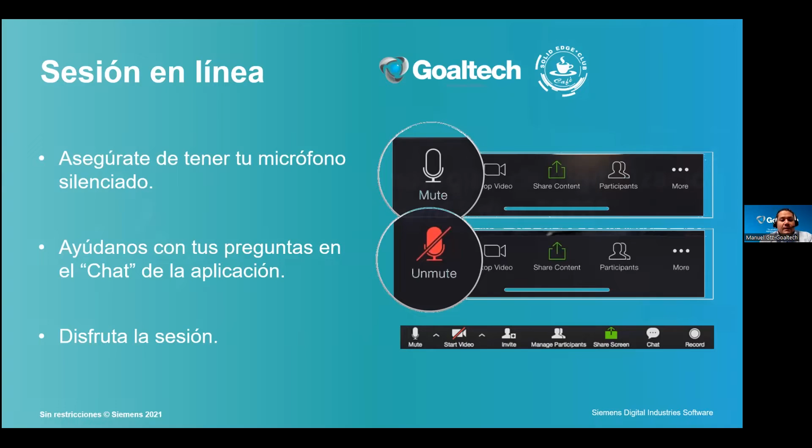En este caso vamos a ahondar un poquito más, vamos a profundizar acerca de las herramientas para crear, conectar y colaborar con la nueva versión 2023.

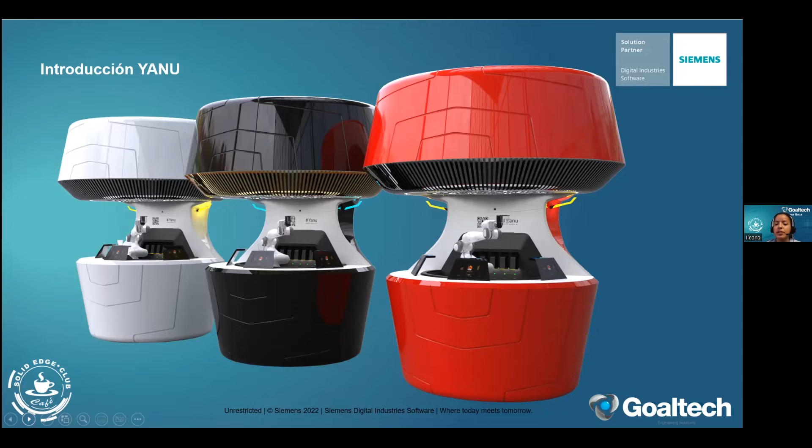¿Qué quiere decir esto? Que él va a ser el encargado de preparar los tragos, manejar los pagos y reconocer a clientes para servir estas bebidas de acuerdo a sus preferencias. Vamos a estar viendo cómo es que funciona.

Y así es, como ustedes lo vieron, este es un robot, un bar autónomo, y surgió la idea a través de la pandemia que nos llevó a cambiar a muchos nuestra forma de trabajar. Los fabricantes se enfocaron en crear un bar sin contacto. ¿Qué quiere decir esto? Que este autónomo va a entregar los vasos directamente en la barra sin necesidad de estar tocando pantallas con una aplicación. Esta versatilidad se ve reflejada en toda esta tecnología.

Cabe destacar que Yanu es uno de los participantes de Solid Edge Startup, este programa que tiene Siemens para los startups que están iniciando en el área de diseño. Si necesitan más información, tenemos un webinar de Solid Edge Café dedicado a esta parte de startup y cuáles son las herramientas que vienen en este programa; nos pueden contactar si necesitan más información. Este va a ser el elemento o producto con el que vamos a estar viendo todas las mejoras a lo largo de esta sesión.

Posteriormente vamos a hacer sesiones enfocadas en cada una de las mejoras. Recuerden que el portafolio de Solid Edge abarca el área desde diseño, electrical y simulaciones. Abarcar todas esas áreas en un ratito no nos daría el tiempo suficiente.

Harsh International are manufacturers of farm machinery, industrial equipment, and hydraulic hoists. Harsh is using new capabilities provided by Solid Edge SaaS to collaborate more effectively and reduce their design and development time by as much as 80%. An 80% reduction in design and development time. Wow, that's what Solid Edge SaaS can enable.

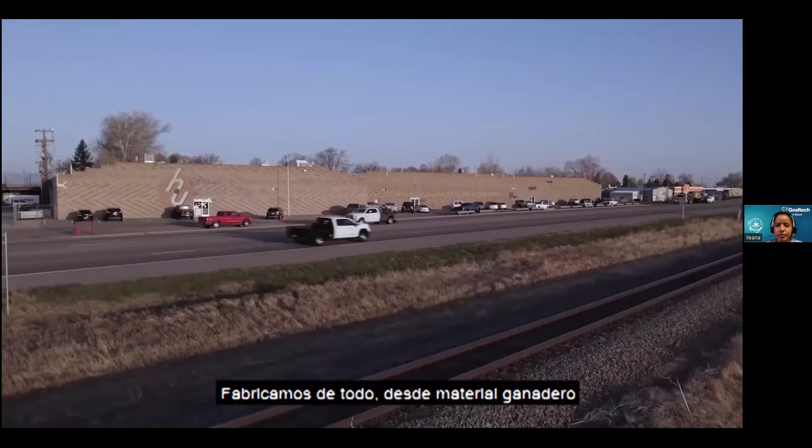Let's take a look at that journey. Harsh International is a manufacturing company in northern Colorado. We manufacture everything from livestock equipment to hydraulic truck equipment. Bob came to me with the idea to create a larger hoist, but one that doesn't have the cylinders swinging underneath the truck.

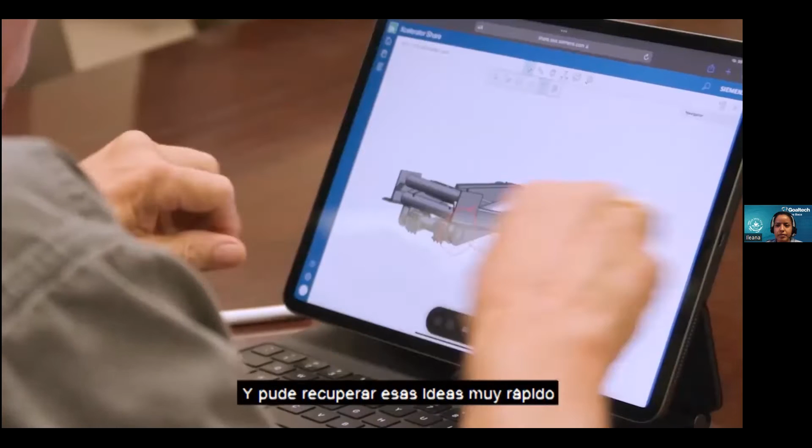With Xcelerator Share, we could click on it, send it to Bob. It didn't matter if it was over the weekend or he might have been in the office next door looking at it. Those guys would be able to pull it up on their computer and just take a look at everything and say, this part could be a little bit different. And I was able to bounce back those ideas really fast between all of us.

The need for people to be in the same room is not near as important as it was before. Now it's on a computer screen. Everybody knows exactly what needs to be done. As soon as they complete it, you see the result of that right there on the drawing, the 3D solid model I'm looking at. The time you spend addressing that issue is dramatically reduced.

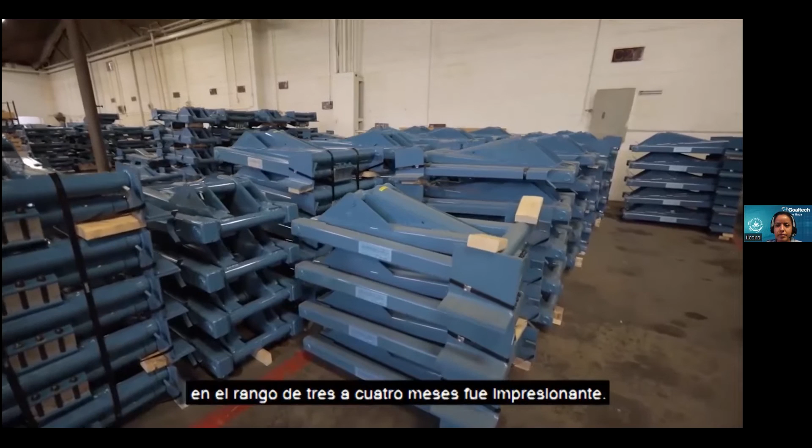Being able to take that hoist from conception to fruition and then on to production in something in the range of 3 to 4 months was awesome. Hitting that market as fast as you can means taking advantage of that market as quickly as you can. That's what Share has done for us.

We love helping companies like Harsh succeed with digital transformation. Siemens is committed to that mission. The investment Siemens has made over the last several years has been just phenomenal.

The result of that investment is Accelerator, a catalyst for the digital enterprise. Accelerator is our comprehensive, integrated portfolio of software, services, and an application development platform. The portfolio accelerates the transformation of businesses into digital enterprises and unlocks a powerful industrial network effect.

As a key part of the Siemens Accelerator portfolio, you can think of Solid Edge as your on-ramp to digital transformation. Focused on the requirements of small and mid-sized manufacturers, Solid Edge enables manufacturers to create a comprehensive digital twin of their products, and includes solutions for mechanical design, electrical design, simulation, manufacturing, and publications.

It also includes solutions for data management, for managing all the technical data that's created and consumed when creating and supporting the digital twin. It facilitates collaboration both within manufacturing companies and with their external resources, including suppliers and customers. Solid Edge is your on-ramp to digital transformation.

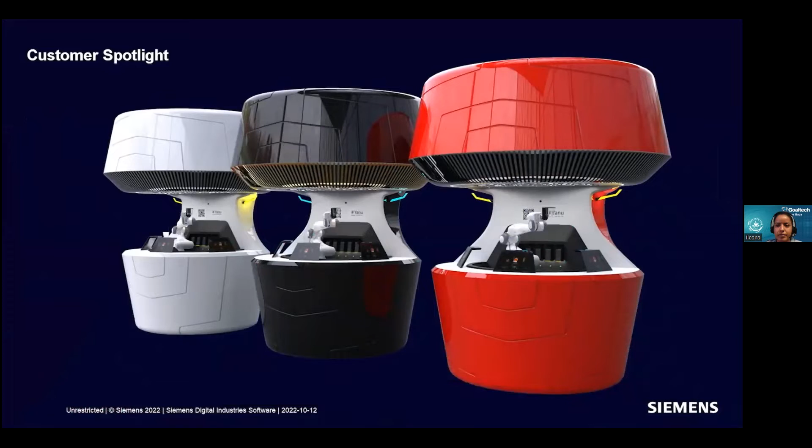With this year's release of Solid Edge 2023, we continue to push the boundaries of product development, leveraging the comprehensive digital twin, with exciting new capabilities such as simplified modeling workflows, value-based licensing, Solid Edge SaaS, improved interoperability, Solid Edge Inspector, Kanban boards, and literally hundreds more.

Solid Edge 2023 is our best release yet. Beta customers have already had the opportunity to experience Solid Edge 2023. Here's what they had to say.

Francisco at Fiorini was really impressed by our focus on daily workflows. And Zohar is excited about being able to work easier and faster.

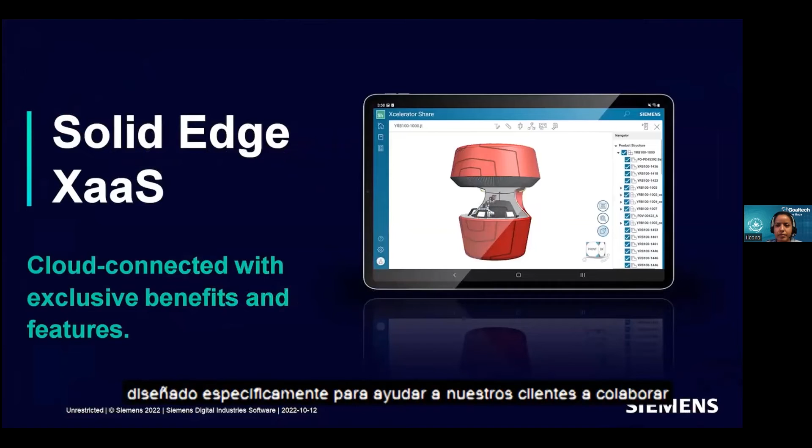Solid Edge XaaS includes next-generation cloud-based technologies specifically designed to help our customers collaborate with colleagues, partners, and customers in a secure environment. And there are many other benefits that come with Solid Edge XaaS.

Let's break it down. First of all, Solid Edge will always be the heart of your product development process with its powerful CAD and manufacturing preparation capabilities. But there's a new way to consume Solid Edge called XaaS. It includes all the things you love about Solid Edge, but so much more.

Data management and security, the ability to have your data securely stored in the cloud and share with others. Augmented reality, the ability to look at your product in the context of the real world. Collaboration, everyone working from that single source of truth, and they can share that data, they can effectively communicate. Mobility, anywhere, anytime, any device. And value-based licensing, gets the features you need when you want them.

Choose the add-on capabilities you want with instant access to tools like Generative Design Pro, Point Cloud Visualization, and Solid Edge Electrical Routing. We'll talk more about the broad range of capabilities you get with Solid Edge XaaS in a second.

Right now, let's focus in on some of the great project management and search tools that are part of Solid Edge XaaS. Jeff? Thanks, Dan.

Collaboration with colleagues, partners, and customers has never been easier with the new productivity and collaboration tools in Xcelerator Share for Solid Edge 2023. A new modern dashboard helps users understand the status of project deliverables at a glance using the Xcelerator Share homepage.

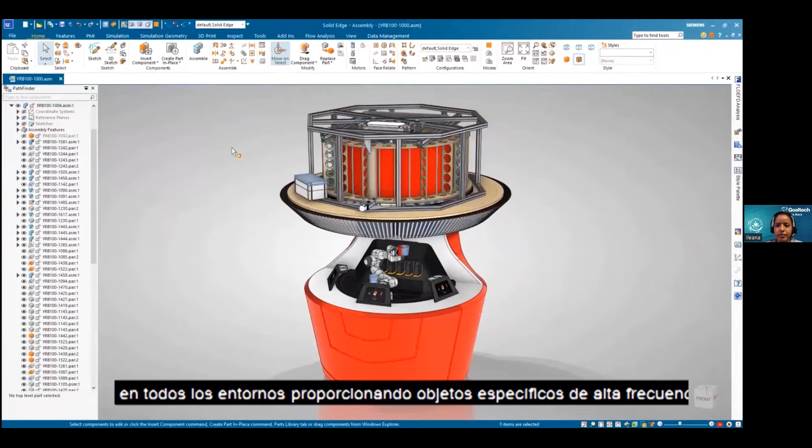Context toolbar capabilities have been expanded in all environments, providing high-frequency object-specific commands at the tip of your fingers, improving productivity.

Focusing on the robot arm, we will complete the design of a new glass holder. The material addition and removal workflows have now been combined into one single command. Also new is the introduction of automatic regions in ordered sketches. This speeds the process of sketching by eliminating the need to trim sketch elements and project face edges.

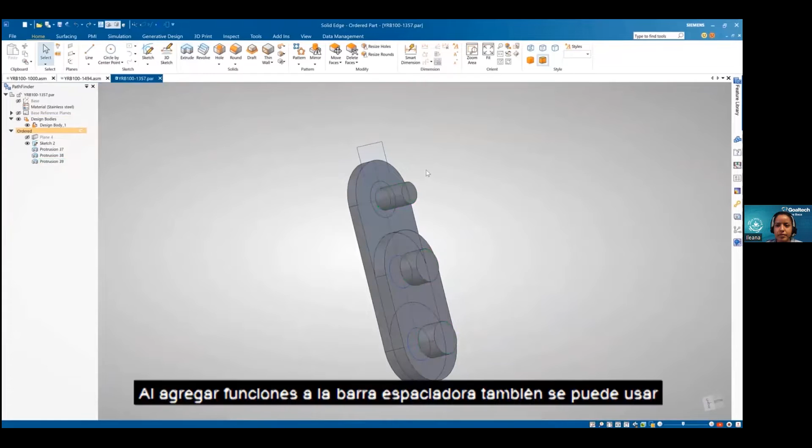Closed areas are found automatically, as we can see here, as we add and remove material with a single extrude command. Changing the extrude feature to a cutout couldn't be any simpler—just edit the feature and change the options. When adding features, the spacebar can also be used as a quick toggle to switch between add and remove.

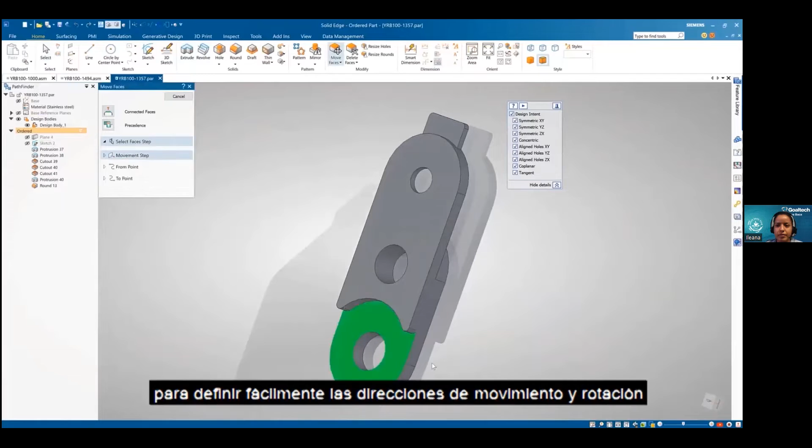Solid Edge 2023 also speeds up the process of direct editing in an ordered model by introducing synchronous capabilities in the move, rotate, and offset commands. Here the steering wheel is used to easily define the move and rotate directions, and design intent rules can be used to control the movement of other faces in the model.

Here we can see this as we adjust these two cylindrical faces and toggle the concentric option on and off. One final alteration of this part is to add an angle to the side faces by using the rotate command. The enhanced workflows make this a breeze.

Since this is an ordered model, the move and rotate features are captured in the Pathfinder and can easily be edited later. The hole feature capabilities have also been extended and now have support for standard class fit tolerances for simple, countersunk, and counterbore hole types. These conform to the ANSI, ISO, and DIN standards. Support for unit tolerance has also been added.

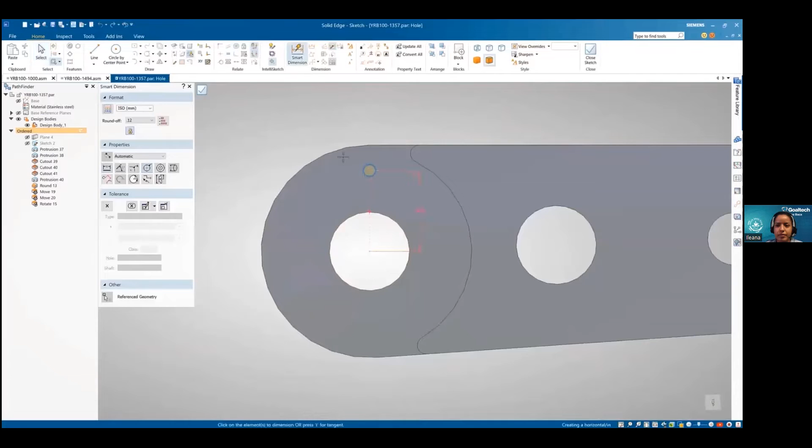Solid Edge 2023 also introduces a new library of high-quality face styles, which consist of many common categories containing thousands of different styles, ranging from additive manufacturing, coatings, fabrics, plastics, metals, and many more. They can easily be dragged and dropped into the desired parts to quickly add realism to any design.

There have also been improvements to assembly features with the addition of new commands such as slot, swept cut, subtraction, and union. In this case, we'll add a swept cut, creating a path through two large components at the top of the design. The workflow is consistent with the swept cut in the part environment.

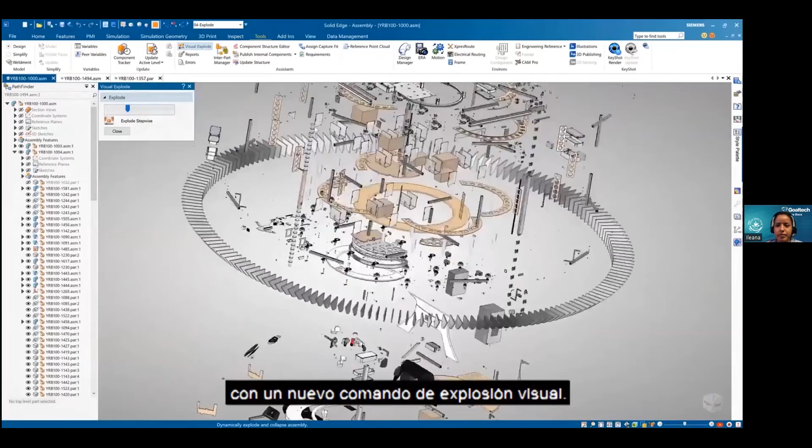Finally, there are new workflows to easily explore and visualize the internal components of any design with a new Visual Explode command. Simply drag the slider bar to dynamically explode the parts on the screen, then drag it back to collapse the parts back into place. There is also a stepwise option that intelligently explodes the subassemblies in sequence and provides additional ways to visualize the design.

Awesome. Thanks, Jeff. It's really exciting to see how some of the great new technology from Synchronous has been moved into the ordered, history-based environment. It's increasing productivity while speeding onboarding for first-time users. Things like regions are just a huge productivity saver, as is the ability to drag to define whether you want to add or cut.

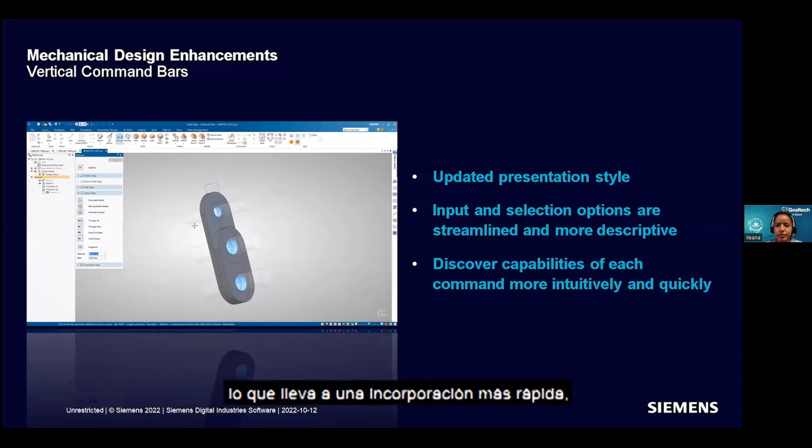In addition to bringing some of the great technology of Synchronous into ordered, we've also revamped the user interface to be a lot more fresh and productive. A clean, modern presentation of a command's options allows users to discover the capabilities of each command more intuitively and quickly. Similar to the presentation styles of many other CAD solutions, the vertical command bars allow new users to adopt Solid Edge more quickly, leading to faster onboarding, increased satisfaction, and a lower cost of training.

We've also brought the commands closer to the action. The context toolbar pops up the highest frequency, object-specific commands right at the user's cursor. With command options available right at the point of focus, mouse travel is minimized, improving productivity and streamlining the user experience.

Mirko Markovic from Kaiser immediately saw the value of the new UI, noting that they can work more intuitively and efficiently.

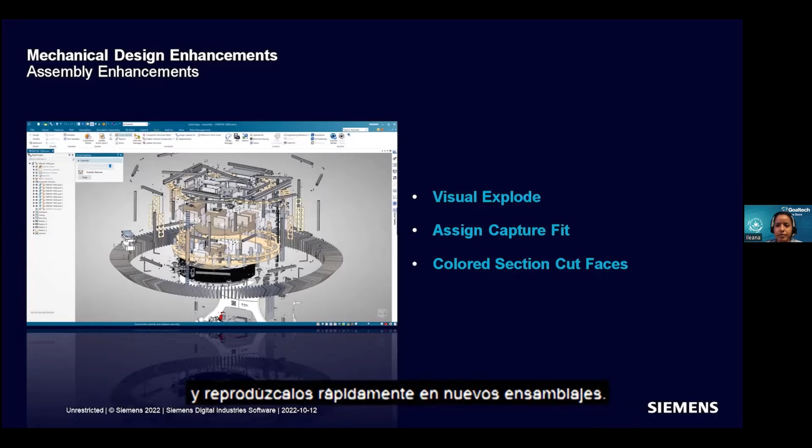And isn't the Visual Explode just amazing? I love that staged mode where it does sub-assemblies first and then it explodes down the levels. It's really great stuff. We've also continued to build out our automated assembly tools by allowing users to capture common relationships and quickly replay them in new assemblies, as well as many other daily productivity enhancements.

Again, positive feedback from Jan, excited about the new Assign Capture Fit functionality. It's great to see all the new material and visual styles as well. This has been a collaboration across various parts of Siemens to deliver not only very useful, but consistent styles across products. It's as simple as drag and drop.

New interoperability enhancements unlock the power of your design data while future-proofing your work. Transfer Solid Edge data to and from the Xcelerator portfolio of products, including NX and Process Simulate, easily and accurately. Let's take a look. Over to you, Jeff.

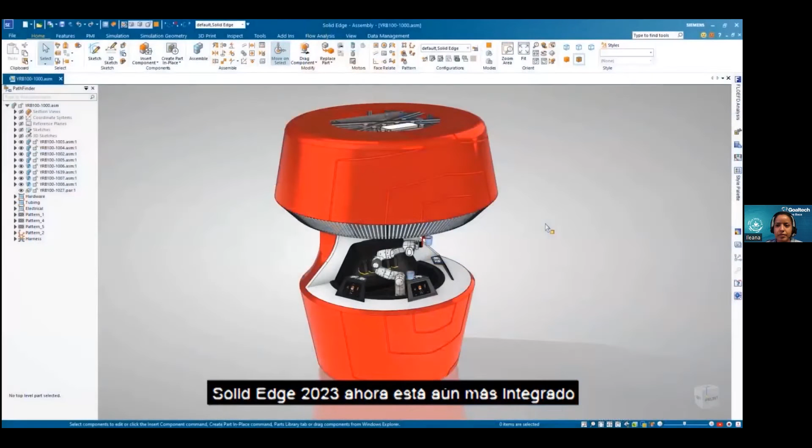Solid Edge 2023 is now even more tightly integrated with other downstream processes and can transfer assembly kinematic information to applications such as NX and Process Simulate to perform further dynamic studies or operations.

In this example, we will see how we can save time and minimize errors by transferring the motion kinematics of this robot arm from Solid Edge to Siemens Process Simulate.

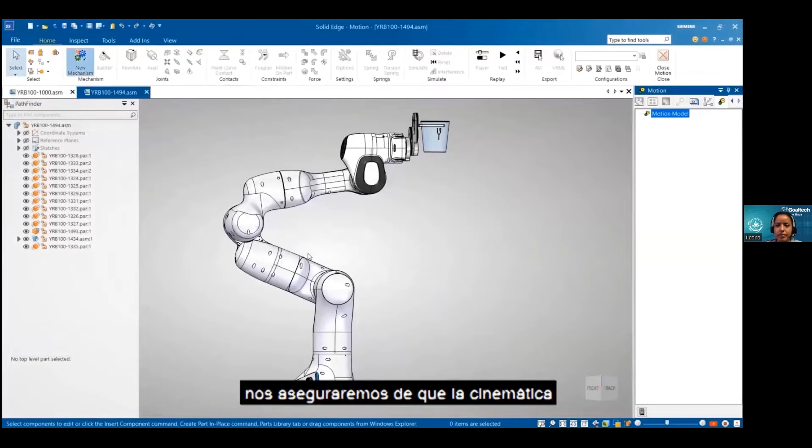Starting in the Solid Edge motion environment, we will make sure the kinematics are properly defined by selecting all the parts, then choosing which ones are moving or fixed. This creates the 7 needed joints to replicate the 7-axis Panda robot. Once this is done, the motion of the robot can be verified by running the basic simulation.

Now the Solid Edge model can be exported with all the appropriate kinematic information and subsequently opened in Process Simulate. Once in Process Simulate, we can see that by using the joint jog option, all the relevant kinematics are present without having to do any additional work.

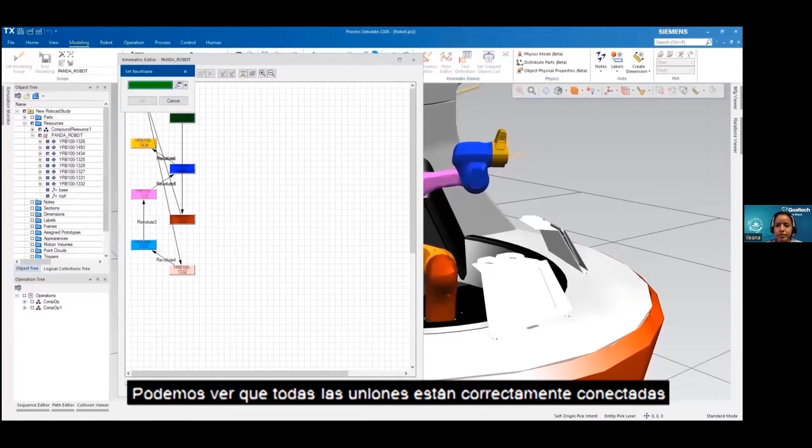The kinematic information of all the joints can be viewed by setting the modeling scope and using the kinematic editor. Here, kinematic relationships are used to define the robot and simulate the reach movement. We can see that all the joints are correctly connected with each other and in the sequence that was defined in Solid Edge.

The movement can be defined from the tool center point frame using inverse kinematic movements which are calculated automatically.

Finally, we can simulate the action of the robot and see the exact movements needed to mix our drink of choice. Solid Edge 2023 increases productivity and provides even closer interoperability and integration with other Siemens portfolio solutions such as Process Simulate and NX Mechatronics Concept Designer.

For example, for process verification using Tecnomatix Process Simulate, or for true virtual commissioning with NX Mechatronics Concept Designer. This seamless integration opens up a whole new world of possibilities via Xcelerator. But we didn't stop with joints and kinematics.

Material and physical properties assigned in Solid Edge are now seamlessly translated to NX. Again, this opens a huge range of Xcelerator options, by providing consistent data for CAE and inspection applications.

Enhanced PMI transfer capabilities include section and model views, and the ability to associate sketch and section view dimensions to a design body. This enhances interoperability with NX CAM and NX CMM and other validation tools.

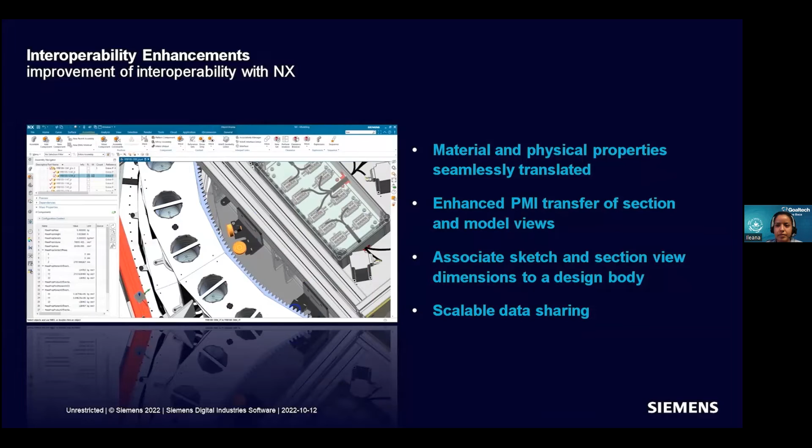And we continue to build out CAD Direct. In addition to NX parts, you can now insert SolidWorks, JT, STEP, and Parasolid files, either parts or assemblies, into a Solid Edge assembly directly, without the need for translation.

CAD Direct makes working and collaborating with partners, suppliers, and even other departments in your company easier than before by supporting multiple file types without the need for everyone to use the same modeling system.

A great feature of this is that solid bodies and surfaces can be inserted in the form of internal components. This means you don't have to keep track of any other files and all different parts on disk, because all the parts are contained directly in the assembly. A great way to manage supplier data.

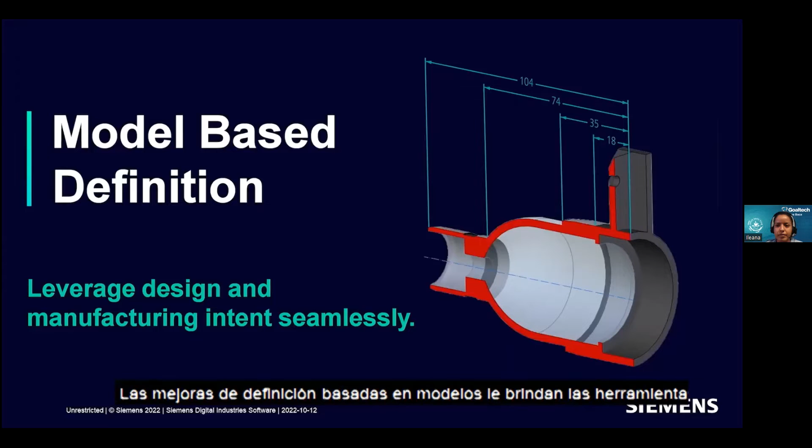Model-based definition: leverage design and manufacturing intent seamlessly. Model-based definition enhancements give you the tools to capture design and manufacturing intent faster and easier than ever before. Solid Edge Advanced PMI delivers high-quality, consistent dimensioning for downstream PMI applications.

Let's take a look. Solid Edge 2023 provides new advanced PMI and model-based definition capabilities, allowing users to detail 3D models faster and easier than ever before, and to seamlessly share 3D model intelligence for downstream manufacturing processes with other relevant stakeholders.

Dimensions can now be automatically arranged on the 3D model with a couple of clicks. Simply select the needed dimensions and the system automatically arranges them, stacked or chained.

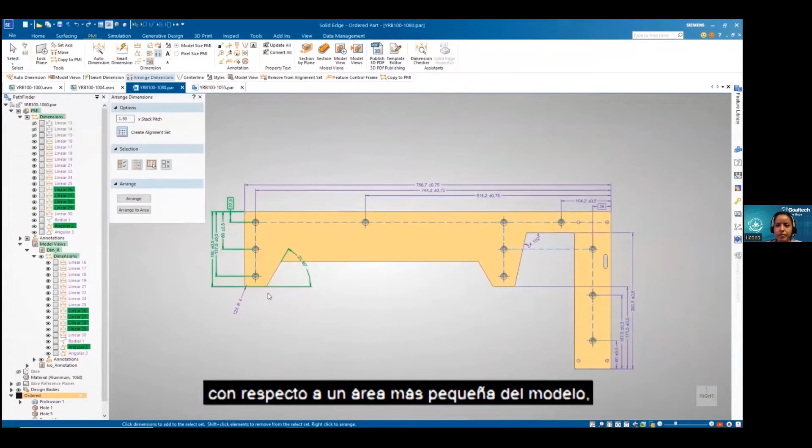If dimensions need to be arranged with respect to a smaller area of the model, there's an option that makes that easy too.

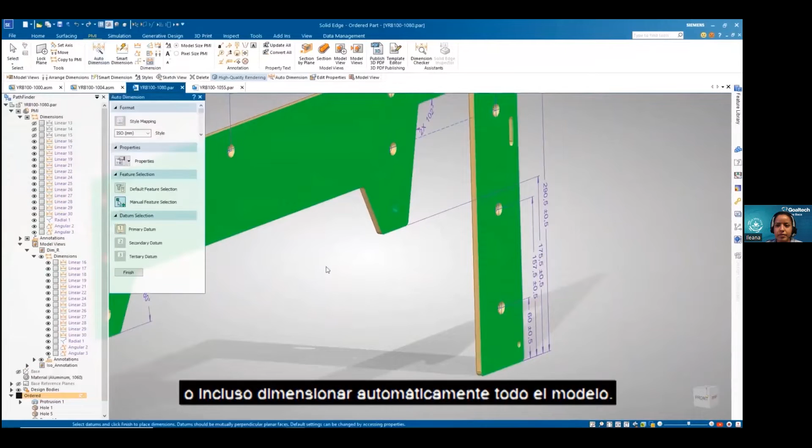This part lacks the necessary dimensions for all the size and locations of some of the holes. The new auto dimension capabilities take care of this with ease. All we need to do is select the primary, secondary, and tertiary planes and select the features to be automatically dimensioned, or even just auto-dimension the whole model. With support for planar faces, cylinders, and holes, it has never been easier or quicker to dimension your model.

We can even define tolerances to be automatically added to each dimension.

The new Model View palette allows for fast interaction with model views. The palette displays easy-to-understand thumbnail images that are directly derived from the model views themselves. Model views can easily be navigated by clicking on the images or by using the arrow keys.

It is also easy to create new views directly from the palette. Here we will quickly create the front view and add the necessary dimensions and tolerances.

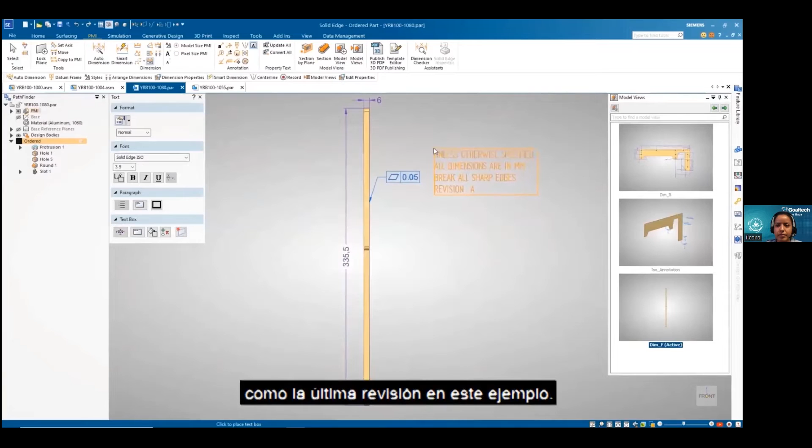With the new text box and note library features, we can easily add notes to the model views. These notes can also include model properties, like the latest revision in this example. There's also an option to keep the text parallel to the screen.

The creation of drawings is a breeze through the new Model View palette. A right click to select the draft template is all it takes to create the drawing. The same Model View palette can be used in the draft environment. Here we will drag and drop the right view from the palette and align it with the existing views.

The fit class and tolerance of holes can also be easily retrieved in callouts. Also, the ability to modify the color of cut faces on section views means it is even easier to differentiate internal details of a model and communicate necessary product manufacturing information.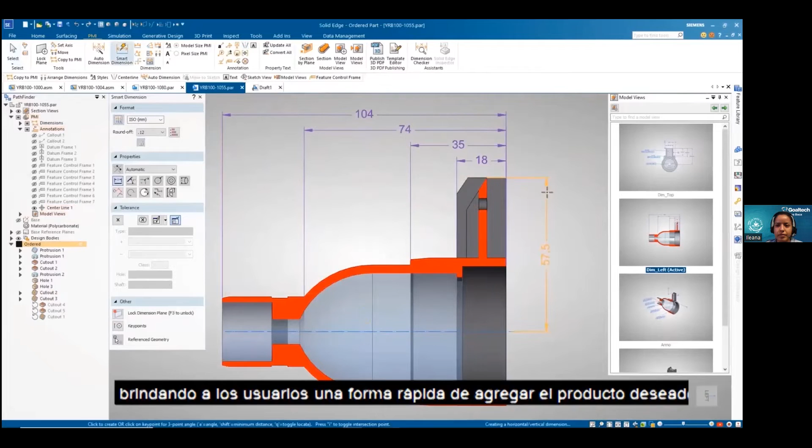3D axis annotation is now supported for appropriate geometry types, giving users a quick way to add the desired product manufacturing information to their models. Section view dimensions and sketches are now associated to the design body, making it easier to use them in downstream processes.

The copy to PMI workflow has also been improved. Now when copying selected 2D annotations and dimensions from the profile-based features or sketches, once they become 3D dimensions, they are automatically connected to the corresponding model faces. Notice that selecting the PMI will highlight the associated faces.

Solid Edge model-based definition allows designers to publish all this product information for use in downstream processes. It is simple and easy to publish a high-quality 3D PDF that contains all chosen model views and supports full view manipulation.

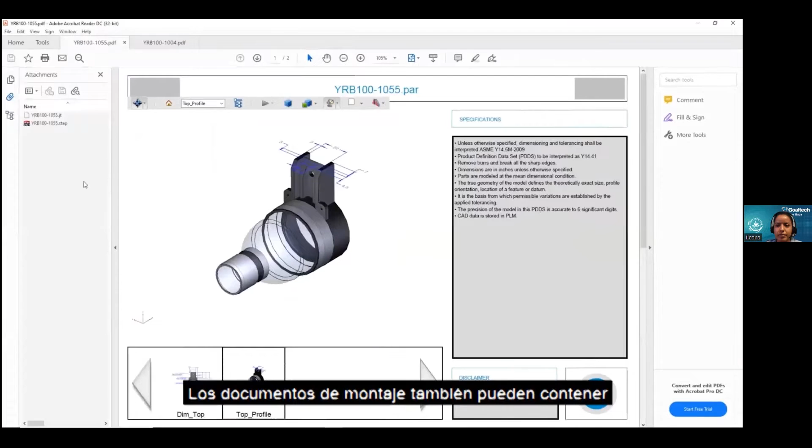Assembly documents can also contain a fully interactive bill of materials and much more. Solid Edge 2023 Advanced PMI and Model-Based Definition capabilities provide new streamlined tools to detail 3D models faster and easier than ever before, and to seamlessly share 3D model intelligence for downstream manufacturing processes with other relevant stakeholders.

That looks great, Jeff. I think it's truly important how we are moving the intelligence out of the drawing and directly into the model. Not only that, though, we're providing new levels of automation.

The new auto dimension command increases productivity by automatically creating PMI dimensions for your part and sheet metal components. Plus, users can save custom schemes with tolerances and hole callout strings to standardize the dimensioning process.

Dimension Checker assistant automatically check part models to determine if the part is over or under constraint. And Dimension Checker's color-coded results are displayed both in the graphical area and in an interactive report, and highlights constraint levels and identifies missing tolerances.

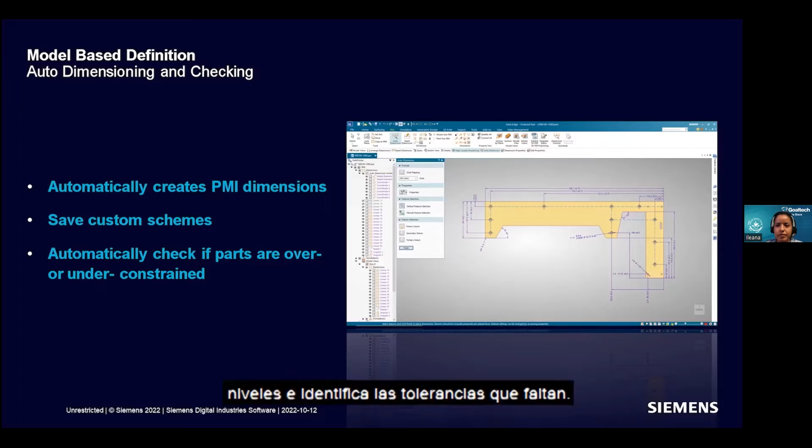I really love the enhanced model view palette. It makes it so easy to manage which dimensions are in which views, and you can really visually see how things are organized. Yet, if you still want to create drawings, they can be created directly from the model view palette with just a few clicks, or simply by dragging and dropping.

We've really built out the number of things you can do in annotating your 3D model as well. Text box annotation enables the addition of notes and other information to your 3D PMI. Notes and text boxes can be saved to a notes library, saving significant time when applying frequently used notes to 3D PMI. The annotations can also be set to always show parallel to the screen or as the model view is rotated.

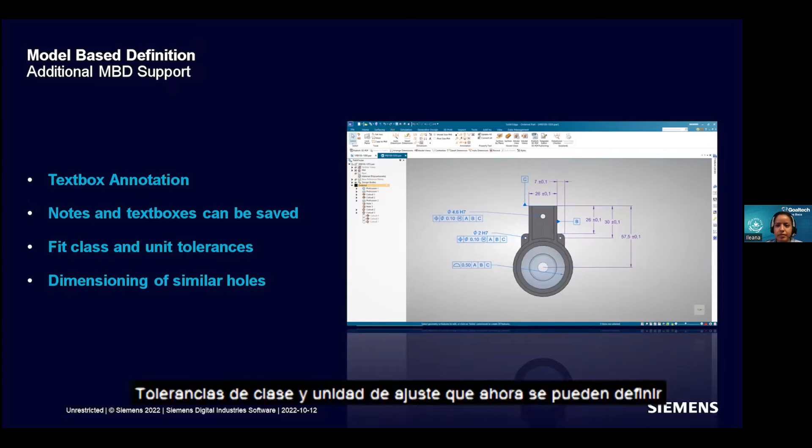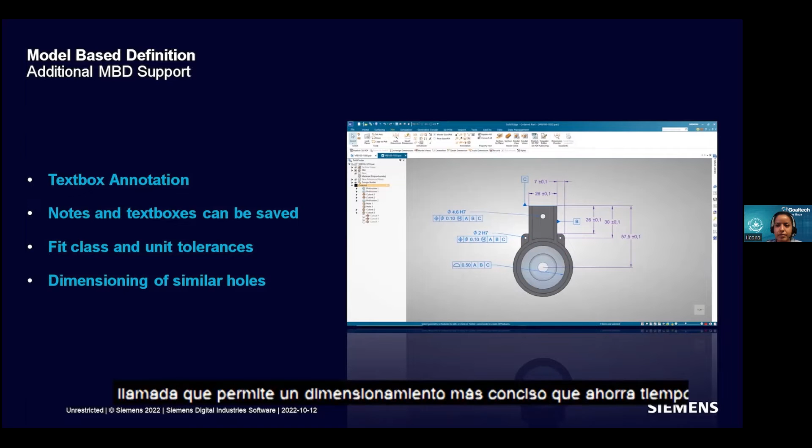Fit class and unit tolerances that can now be defined in the hole feature in the design environment can easily be included in drawings or in the PMI dimensioning. Dimensioning of similar holes can be grouped into a single callout, allowing for more concise dimensioning, saving time and reducing confusion. Solid Edge Inspector automatically generates quality inspection data and reports users can trust, while enabling seamless communication in the downstream manufacturing process. Here's Jeff.

Thanks, Dan. Quality inspection is an important competitive factor. Using Solid Edge Inspector makes inspection planning a quick and easy process.

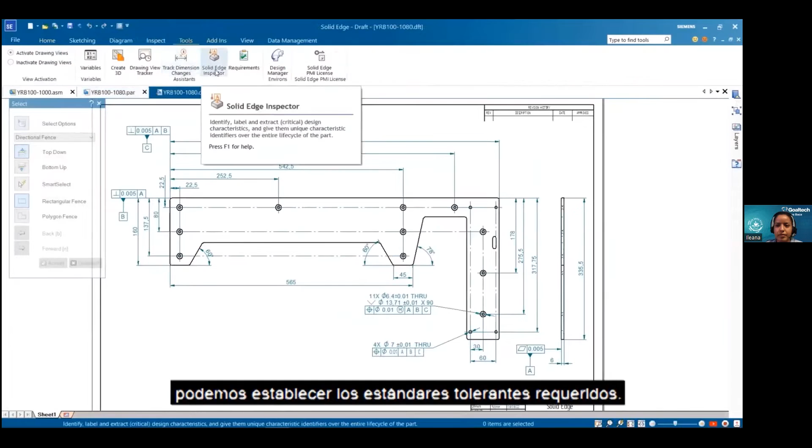Let's take a look at the side plate in this Yanu AI robotic bartender. We'll open the drawing that already has all the relevant manufacturing information defined. Launching Solid Edge Inspector, we can set the tolerance standards required. If needed, multiple tolerance tables can be configured that can apply later based on the part type.

Creating characteristic numbers with balloons is a quick and easy process. There is also the flexibility to create balloons manually or ignore some specific dimension types. Based on the standard and configurations that have been set here, the default tolerances get applied for the dimensions that do not have specific tolerances defined.

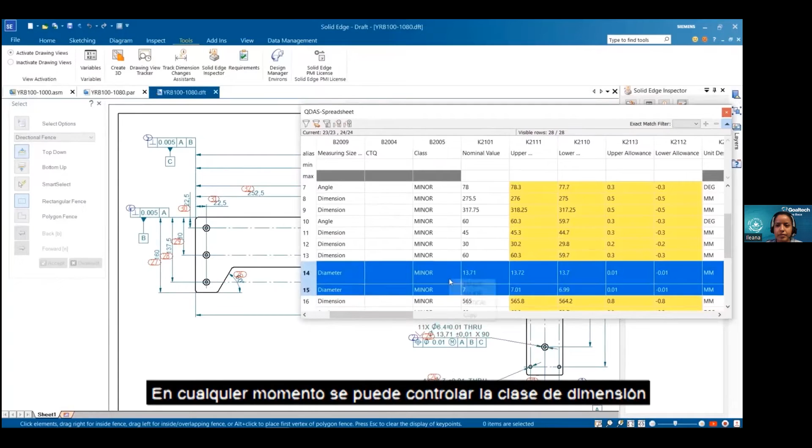These dimensions are highlighted in yellow in the characteristic table. At any time, the dimension class can be controlled to define how critical they are. The inspection balloons can also be shown or hidden as required.

The inspection information can be exported into multiple file formats and can be used later in downstream applications. It's also possible to export this information as separate project files that can later be re-imported into the drawing. This is very useful in situations where the quality team does not have write access to the CAD file.

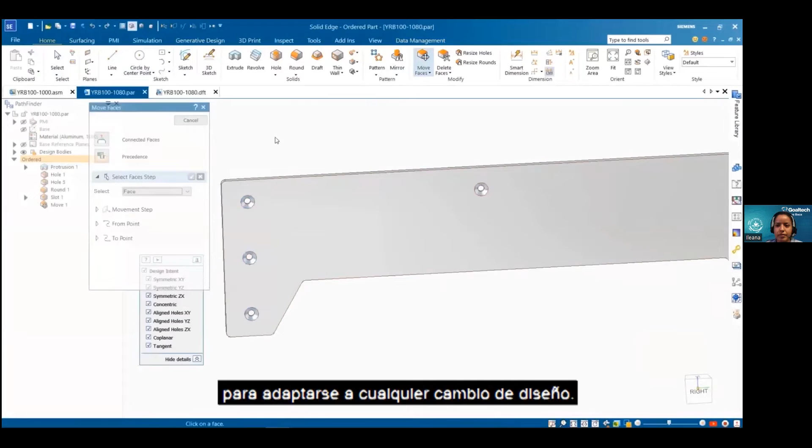Inspection reports can be generated by choosing a template. These templates can easily be configured for any industry standard. The inspection data can also be easily updated to accommodate any design changes. Here are changes made to the model and the drawings then subsequently updated.

Now we will also delete a dimension and add a new dimension. A simple click of a button updates the inspection data. This will add a balloon to the new dimension and updates the CN list with this information and all the other changes that are made.

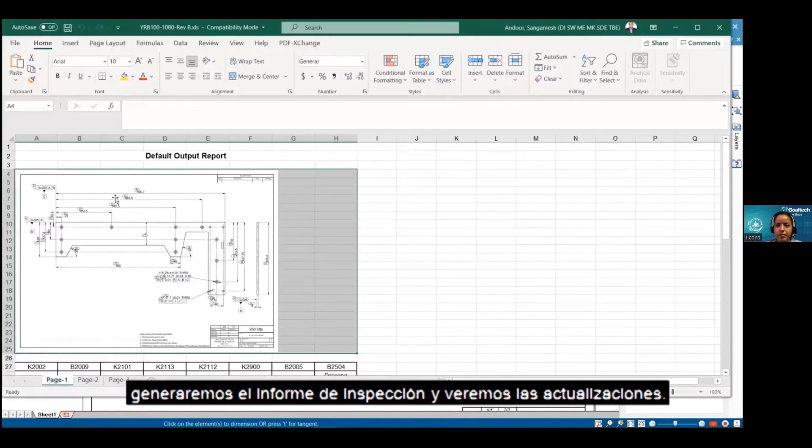Changes like modified dimensions, new and deleted dimensions are captured as part of the CN list. Filters can be applied to these columns similar to Excel. As the design has been modified and the drawings updated, we'll generate the inspection report and see the updates. The list shows new, modified, and deleted dimensions.

Filters can also be applied to the CN list to generate a compare report. This shows only the changes that were made when compared to previous versions.

Solid Edge Inspector also fully supports a model-based inspection process. This means it works seamlessly on the 3D model in an MBD workflow. Just like we saw for the 2D drawing, it is possible to create and edit balloons and generate a report on a 3D model using the PMI dimensions and annotations. Solid Edge Inspector provides a competitive edge by streamlining the quality and inspection planning process.

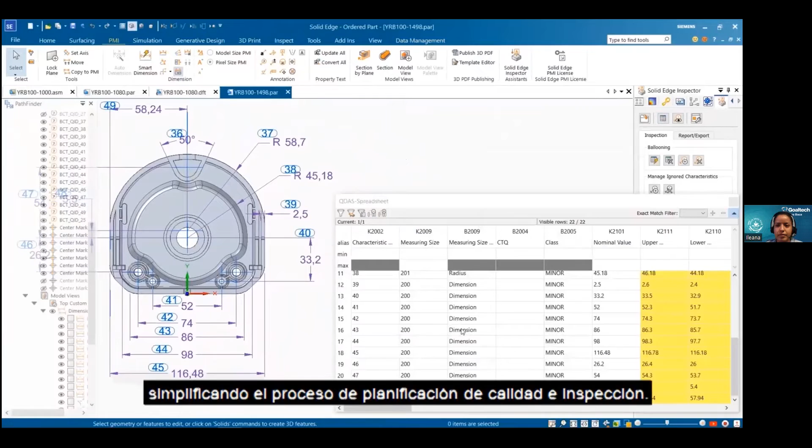Wow, Jeff, I think that's really going to be a big time saver for a lot of Solid Edge customers. As you saw, Solid Edge Inspector automatically identifies, labels, and extracts critical design characteristics from 3D models and drawings. And unique identifiers are assigned that are linked to this design information over the entire life cycle of the part through all changes, modifications, and iterations.

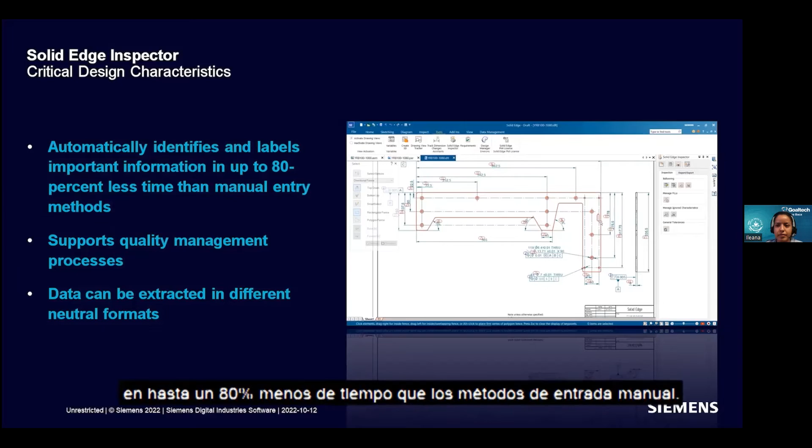Solid Edge Inspector saves users valuable time by automatically identifying and labeling the important information in up to 80% less time than manual entry methods. Plus, for increased downstream consumption and better communication with colleagues, the data can be extracted in different neutral formats, including Microsoft Excel.

First article inspection reports can be automatically generated and are essential to effective inspection planning. Those first article reports can assist in locating errors that could cause issues later in the product's life cycle, saving time and money by catching errors before the product proceeds downstream in the manufacturing process.

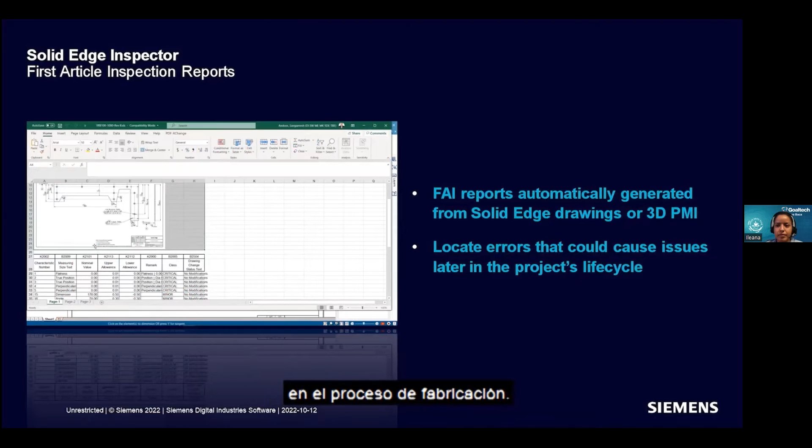Enhanced capabilities now allow for simulation on convergent models. Expansion of body mesh functionality to include assembly and sheet metal simulation reduces meshing errors and accelerates the speed of simulation studies. Let's take a look at that.

Solid Edge 2023 continues to accelerate the design process by providing powerful tools to help digitally validate designs and build better products in less time by front-loading the simulation process. We will start with a generative design study that will help optimize the weight and material usage for a caster wheel component.

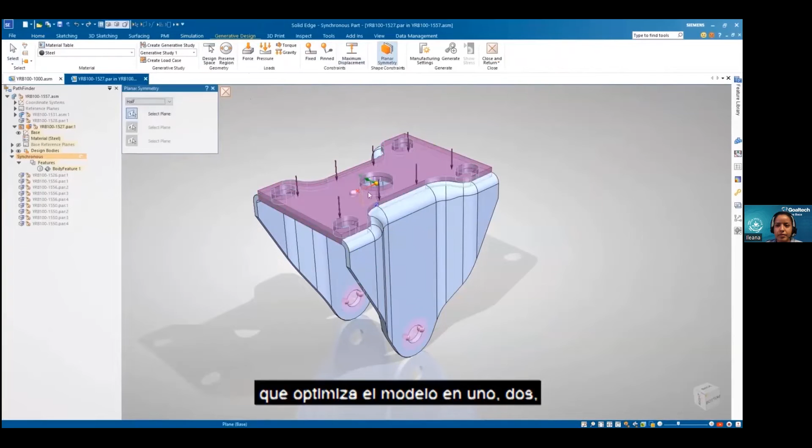After creating a new study and defining the loads and constraints, we have the new ability to define the maximum displacement for a point on a given face. This helps guarantee the model has the appropriate amount of stiffness in a given direction. Also, planar symmetry is a new shape constraint that optimizes the model across 1, 2, or 3 orthogonal planes. This ensures the optimized model will result in the best possible symmetric design.

Viewing the results, we can see that both sides of the model are identical due to the planar symmetry constraint. Selecting the Show Stress option gives immediate feedback on areas of high stress concentration so we can adjust our model if necessary. The optimized generative design is a unique hybrid model that combines BREP and mesh geometries, which can be sent directly for additive manufacturing.

Moving to structural simulation, Solid Edge 2023 now supports the ability to analyze these hybrid mesh and BREP models. This allows us to easily validate the results of the generative study by applying the same load and constraints in the new study.

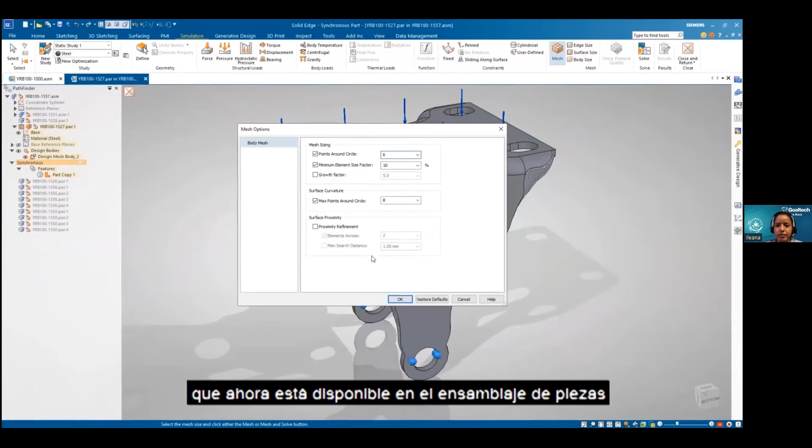The body mesh option, now available in the part, assembly, and sheet metal environments, has new options that allow the resulting mesh to be simplified and improved by defining parameters such as the number of points around a circle. In addition to producing a good quality mesh, it provides automatic geometry cleanup of small faces and edges.

After solving, we can analyze the model and see that the areas of high stress match the results we saw during the generative design study.

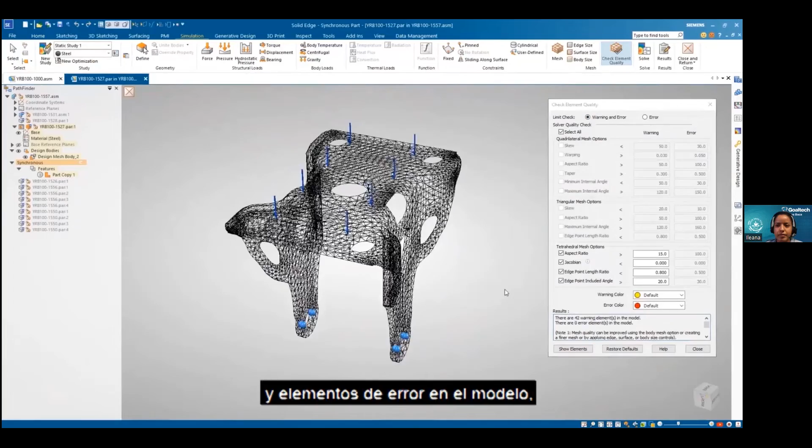A new check element quality command has been added, enabling us to view and report any poor quality elements created when meshing. There are 14 Nastran quality checks available. Here we check the tetrahedral aspect ratio, or ratio of longest to shortest element edge. Selecting Show Elements highlights and displays the warning and error elements in the model, as well as generating a report containing a summary of error elements.

There are no errors in our mesh, but a few warning areas could be improved in a future study if needed. A great usability enhancement in Solid Edge 2023 is the ability to reuse an existing mesh.

Here we will duplicate our study and bring the mesh with us. We want to test the model again, but with a higher load this time. By reusing the mesh, we are able to save valuable time by not having to remesh the same geometry. This enables us to quickly run multiple iterations of our study, ensuring the design meets all of the necessary requirements.

Solid Edge 2023 further enhances our robust simulation capabilities, saving valuable design time and reducing material and testing costs.

Super, great stuff, Jeff, thanks. This is actually pretty remarkable.

Although in theory generative models are created based on the actual part stresses, we find that some customers want an extra validation pass using proven Simcenter Nastran solvers. And with our unique Siemens technology, we can actually mesh a mesh.

So you can perform simulation studies on convergent models using generative design, reverse engineering, and enhancing Solid Edge's capabilities to seamlessly incorporate mesh-based geometries into the design process.

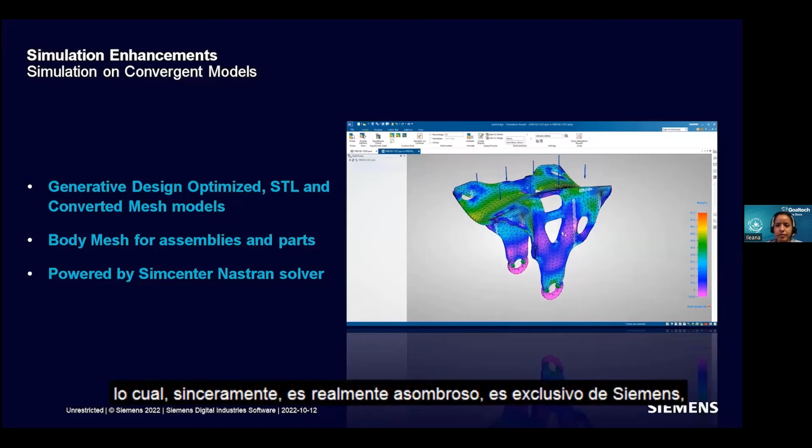The functionality of body mesh, which honestly is truly amazing, is unique to Siemens, has been extended. Originally introduced in 2022 for parts, it has been expanded to support assembly and sheet metal simulation.

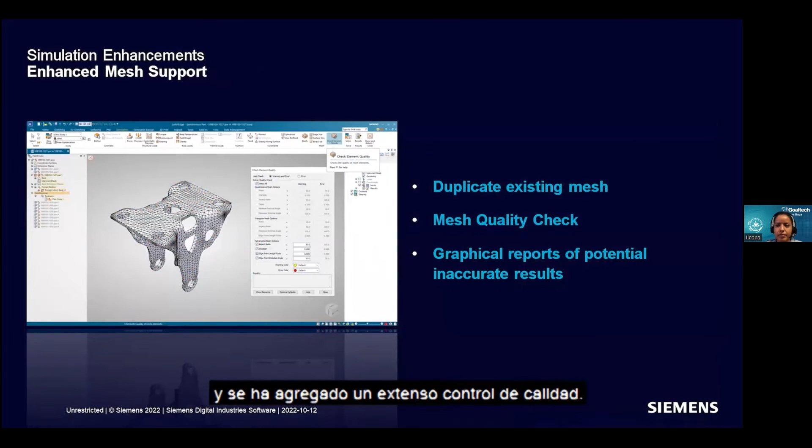We also continue to build out the core of simulation, the stuff you do daily. So support for duplicating meshes and extensive quality checking has been added.

Generative design has received a significant upgrade as well. New generative design commands, planar symmetry and maximum displacement constraint, give users the ability to do studies faster and more effectively than ever before.

Solid Edge Cam Pro enhancements let you machine parts more efficiently while giving you the ability to create more shapes, including those that would have otherwise been too expensive or even impossible.

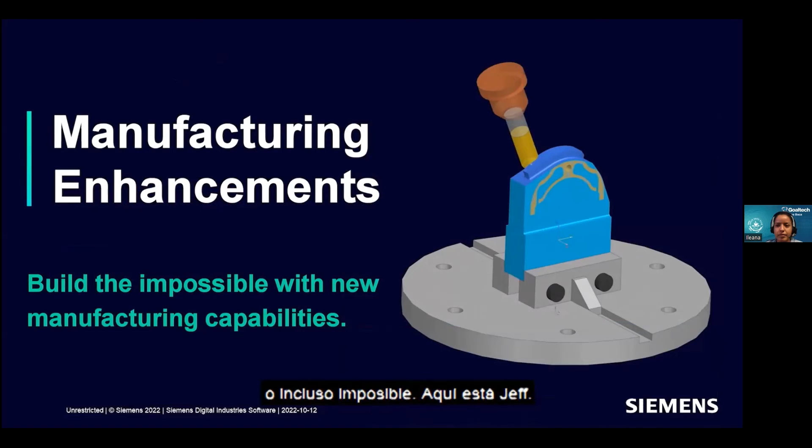Here's Jeff. Transform your manufacturing and maximize your design data with the powerful automated tools of Solid Edge's fully integrated CAD/CAM solutions.

Starting with 5-axis machining, we will focus on this part. Since it has features on all sides, a 5-axis approach will allow it to be machined in one single setup.

The fixture has also been designed completely in Solid Edge. This is using a window frame technique where the stock body also serves as a holding device. A single button click sends the whole fixture and part to Cam Pro.

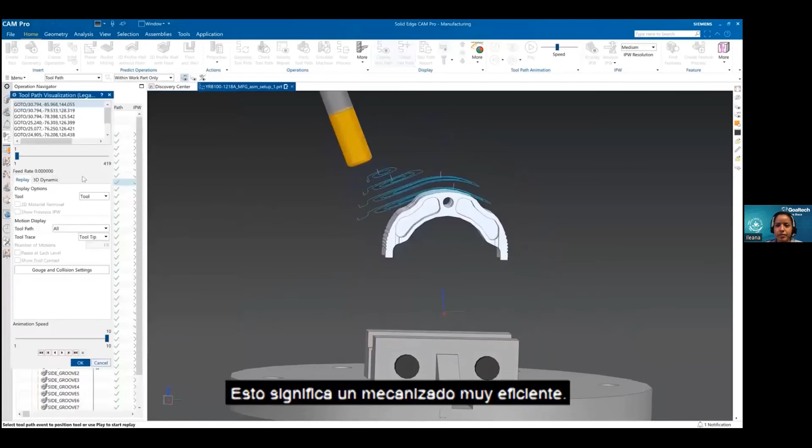Opening an existing setup reveals some CNC programming work that has already been done. Solid Edge Cam Pro 2023 now supports the adaptive roughing cut pattern for 5-axis roughing. This means very efficient machining and expert control of the stress on the cutting tool, and as a result extends the life of the tool.

Here we'll look at the machining simulation. This is another great innovation in Solid Edge Cam Pro, the ability to perform G-code-based simulation. Here the machine motion on the virtual machine is being driven by the actual G-code file. We can visualize all the axis tracking while the G-code file is being run, a true example of leveraging a digital twin.

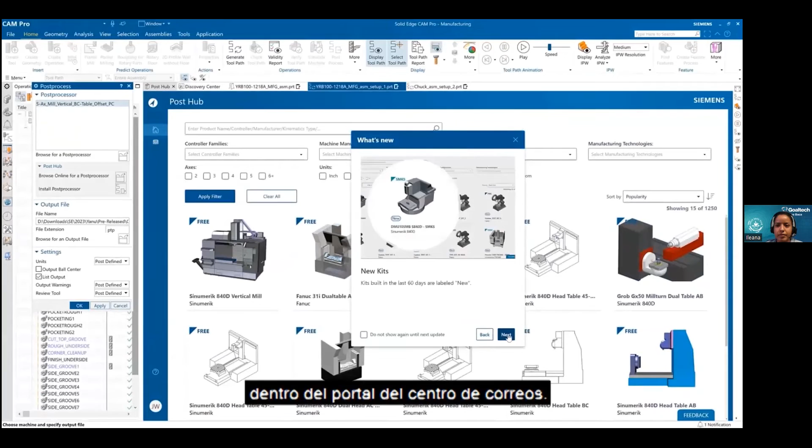Another great enhancement in Cam Pro is the addition of Machining Kit simulation within the Post-Hub portal. There are packages covering 3, 4, and 5-axis G-code simulation. Each package provides access to all of the machines in the group.

Also, Post-Hub can now be a repository for things other than post-processors. For example, best practice documents, technical libraries, and much more.

Another new capability is rotary roughing on 4-axis machines. Not only is the operation easy to use, but this machine simulation shows it does a great job with this spiral groove or any other 4-axis feature.

Solid Edge Cam Pro 2023 also introduces a brand new wire EDM capability. This makes programming these operations a breeze.

Okay Dan, back to you.

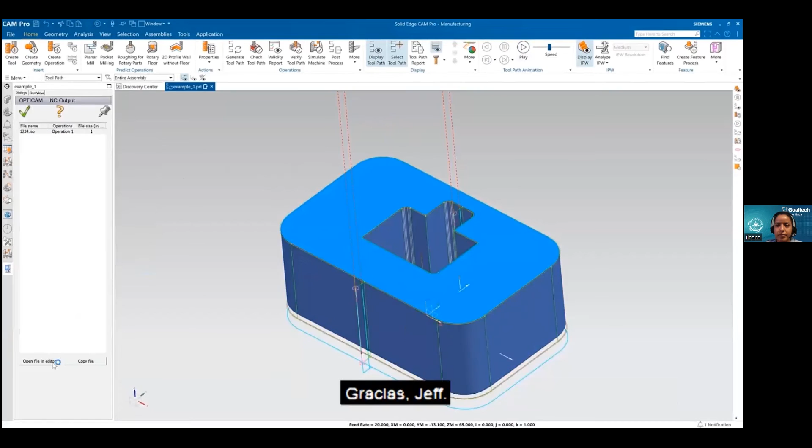Thanks Jeff. It's really satisfying to see our CAM capabilities continue to grow, built on the best CAM in the business. The new 5-axis roughing enables customers to spend less time creating CNC programs while enjoying better tool paths and faster machining throughput.

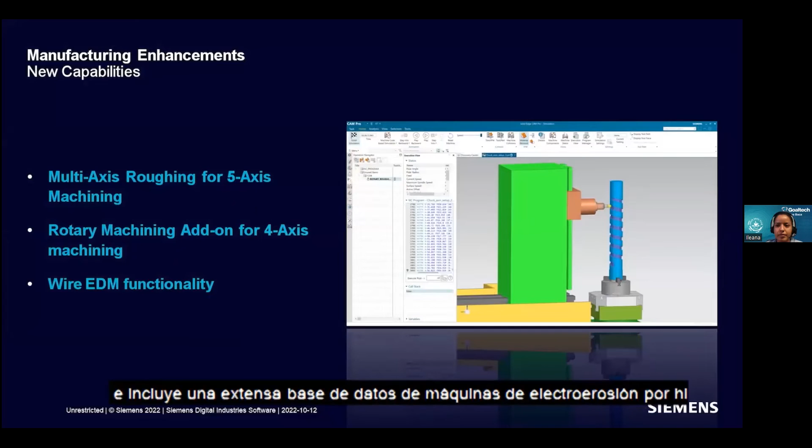New rotary machining for 4-axis improves users' ability to create shapes, even previously impossible ones. Plus, new wire EDM functionality rounds out the offering and includes an extensive database of wire EDM machines.

Standardized, professionally built machine simulation kits are available in an easy-to-access library through Post-Hub. The Smart Machine Kits library eliminates the need for time-consuming, expensive, custom-built simulation kits.

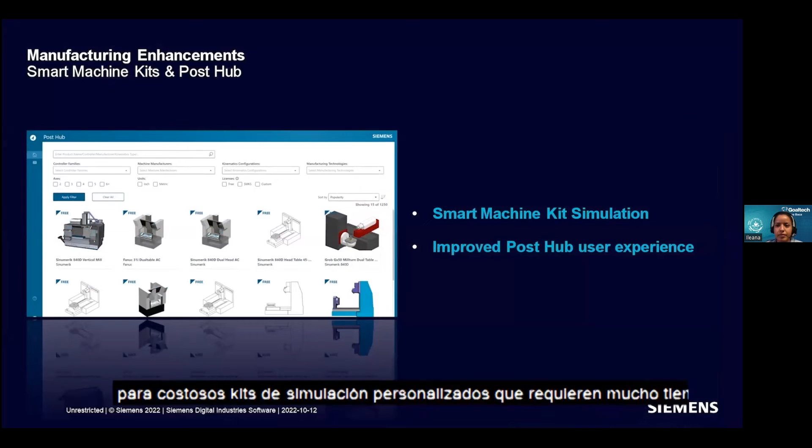A new modern user interface for Solid Edge technical publications and enhancements to usability, workflows, and animation lets you do even more with your illustrations and technical documentation. Let's check it out. Over to you, Jeff.

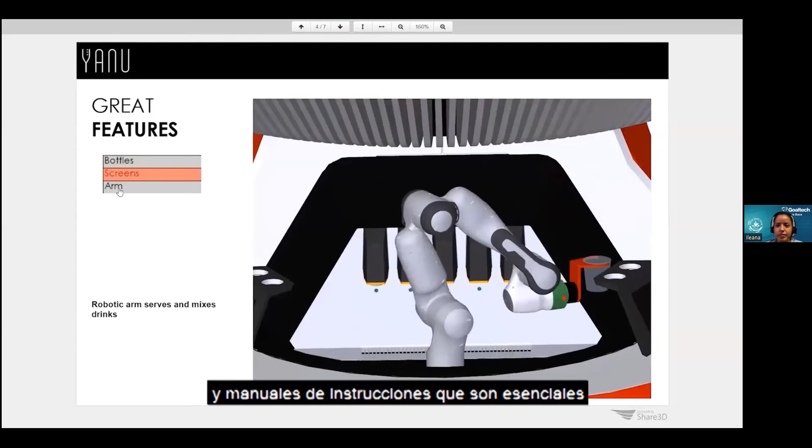Solid Edge 3D Publishing speeds the process of creating compelling and engaging technical documentation, such as installation, maintenance, and instruction manuals that are essential to business success and product performance. Let's dive into the creation of this document for our Yanu AI bartender.

With a fresh and updated user interface with improved performance and a similar look and feel as Microsoft Office products, creating documents with Solid Edge technical publication is a breeze. A new Page tab allows for easier navigation of documents. With a thumbnail image available for each page, users can now navigate their document by clicking a thumbnail image to go directly to that page.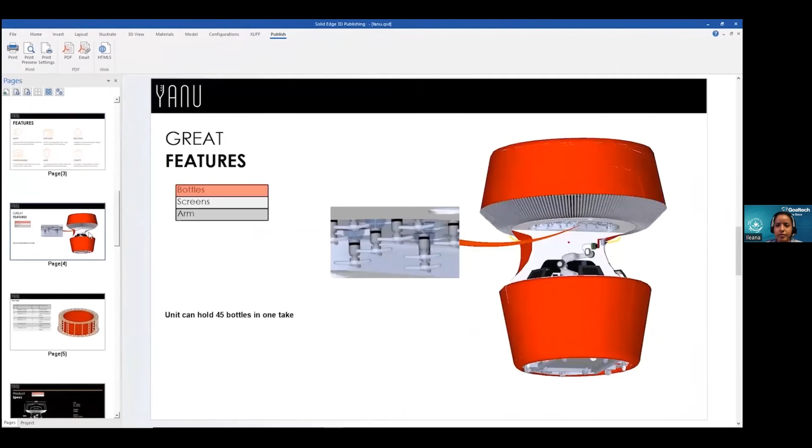Also new is the ability to assign rich text to metadata and illustrations. Here, text styles can be fully customized to fit your need.

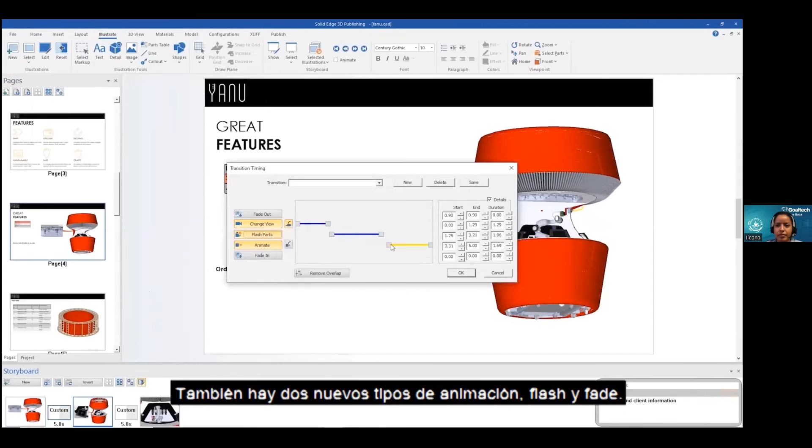Animations play an important part of conveying different messages and features in a document, whether marketing or instructional. Here, a new transition editor makes it easy to create custom transitions with user-defined timing for camera movement, part reveal, and other animation features. There are also 2 new animation types, flash and fade. Here, a flash animation is being used to highlight the LCD screen, and then fade animation slowly hides the screen in order to focus on the robot arm and its animation.

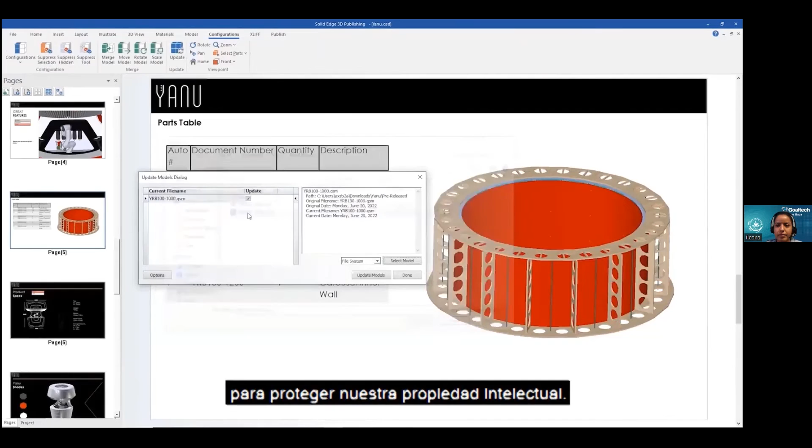Also new is the ability to use simplified parts and assemblies, family of parts, and family of assemblies. For the Yanu instruction manual, we'd like to hide some key details on some of the parts to protect our intellectual property. To do this, we can easily replace the detailed parts with their simplified representations. This is achieved with the update command. Solid Edge 3D Publishing then takes care of replacing them in our model, all achieved quickly and easily without having to recreate the document from scratch.

With this year's release, users can also define multiple master pages to help with document creation. This provides more versatility in large documents.

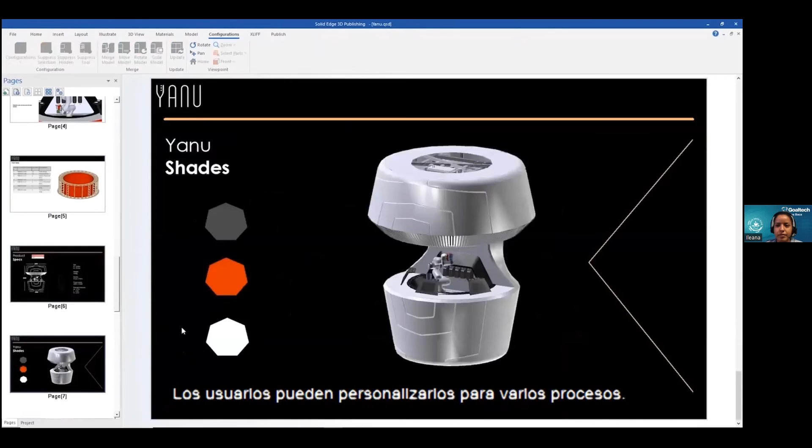Shapes can act as fully actionable items in Solid Edge Technical Publication. Users can customize them for various processes such as switching illustrations, customizing views, or even directing to web pages. In this page, we can use the button to switch between different colors of the Yanu AI Bartender.

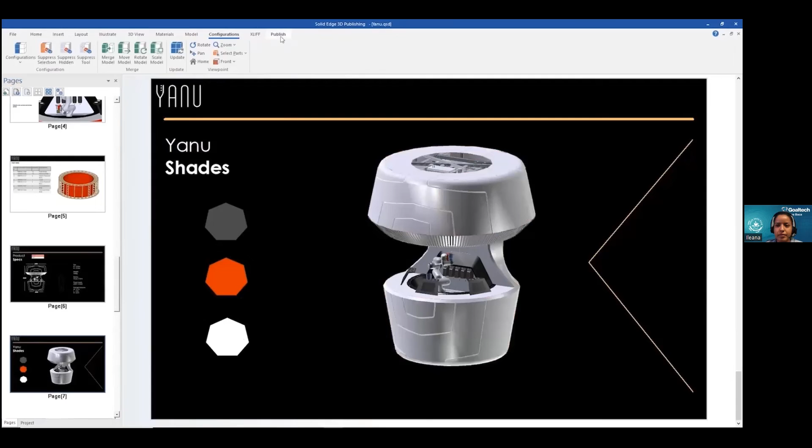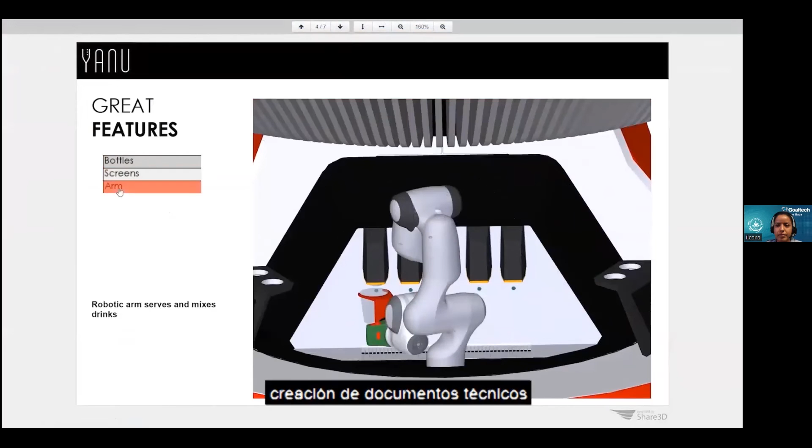Documentation can be published to all the latest industry standard file types, including 3D PDF, HTML5, raster, and vector images. Here's the complete instruction manual in HTML format. End users can access this information without any additional software, as it will open in any modern browser. With Solid Edge Technical Publications, creating technical documents and interactive manuals has never been easier.

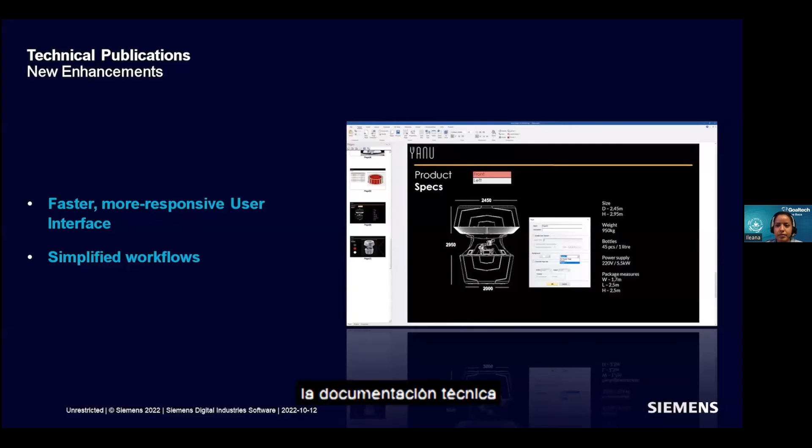Thanks, Jeff. It's clear that the new modern user interface makes Solid Edge Technical Publications faster and more responsive than ever before. There are just so many enhancements, but some favorites are the ability to flash and fade parts during storyboard animations, or the leader line outlines that provide better contrast and visibility while highlighting the content of illustrations. And the new support for Solid Edge simplified parts and assemblies can significantly reduce the file size of illustrations, the technical documentation, without sacrificing the intended message or instruction.

Value-based licensing, part of a XaaS subscription, gives you access to a wide variety of Solid Edge products without having to buy in each individual product. You can use what you want when you want it. So let's take a look at how it works.

New for Solid Edge, value-based licensing, a flexible licensing option to help you with the challenges of a rapidly changing development environment. This approach allows you to discover new Solid Edge add-on products while increasing flexibility for you and your team.

Let's have a look at how value-based licensing works. Starting with the base application, Solid Edge Classic or Premium, value-based licenses offer a fully flexible environment in which users can explore different functionalities. Companies acquire a set of tokens which allow the running of a wide array of applications.

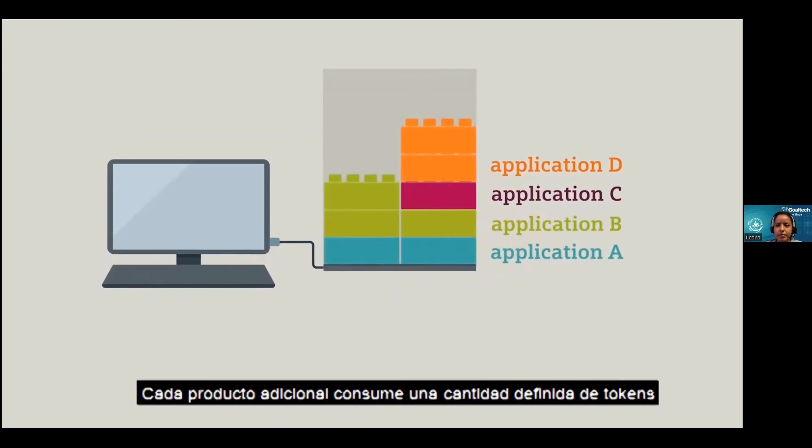Tokens are available in yearly subscription packs that make the add-on products available as a single shareable bundle. Tokens can be checked in and out to allow for maximum flexibility. Each add-on product consumes a defined number of tokens when in use. The total number of applications and which specific applications that can be checked out is limited by the number of tokens users have available.

Value-based licensing is even more flexible when combining multiple users, each with their own desktop and set of tokens. Imagine a worker is confronted with the maximum token limit. By having a joint token pool, the limitation is automatically lifted as he or she is able to claim unused tokens from a colleague. In this context, it's also perfectly possible for users to use the same application simultaneously, as long as the token maximum isn't reached.

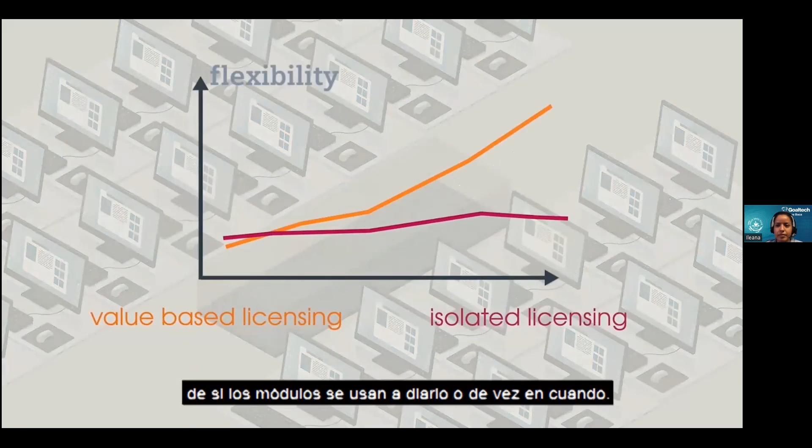Value-based licensing gives you the ability to manage cost, discover new applications, and easily scale your business. In many cases, the total investment is less than individual licenses, yet the flexibility dramatically increases, regardless of whether the modules are used daily or occasionally. Value-based licensing, new for Solid Edge, offers a truly flexible, cost-effective, simple-to-scale approach that reduces risk over time and encourages users to maximally explore new possibilities.

It grants access to multiple products through a system of tokens. Tokens are available in yearly subscription packs of 25 and 50, making those add-on products available as a single shareable bundle. Tokens can be checked in and out to allow for maximum flexibility. It's really the ultimate in flexibility and will give you access to technologies you never thought possible.

The Solid Edge portfolio of products supports digital transformation through a powerful, comprehensive, and accessible set of tools. You can of course continue to buy Solid Edge in its traditional or perpetual form, but Solid Edge SaaS is now available as well. To learn more about Solid Edge SaaS and the benefits it can provide your company, please reach out to your Siemens partner for additional details.

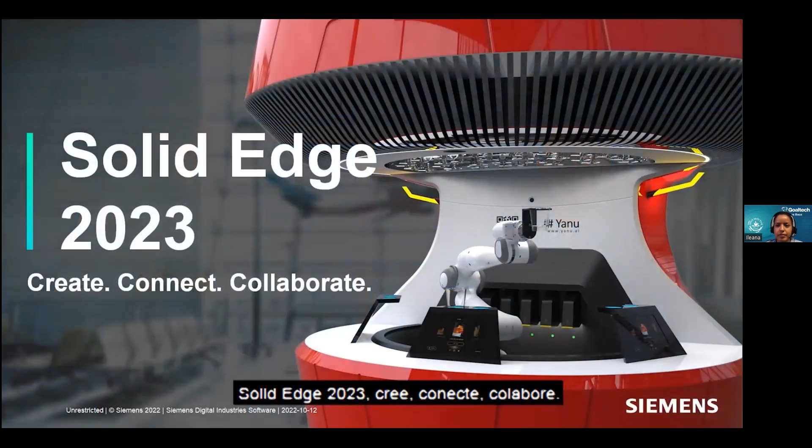Today we've shown you some of the great new capabilities of Solid Edge 2023. Companies like Yanu, Harsh, Chantiers de l'Atlantique, and more trust Solid Edge to help grow their businesses. Isn't it time for you to take a hard look at Solid Edge 2023? Solid Edge 2023. Create, connect, collaborate.